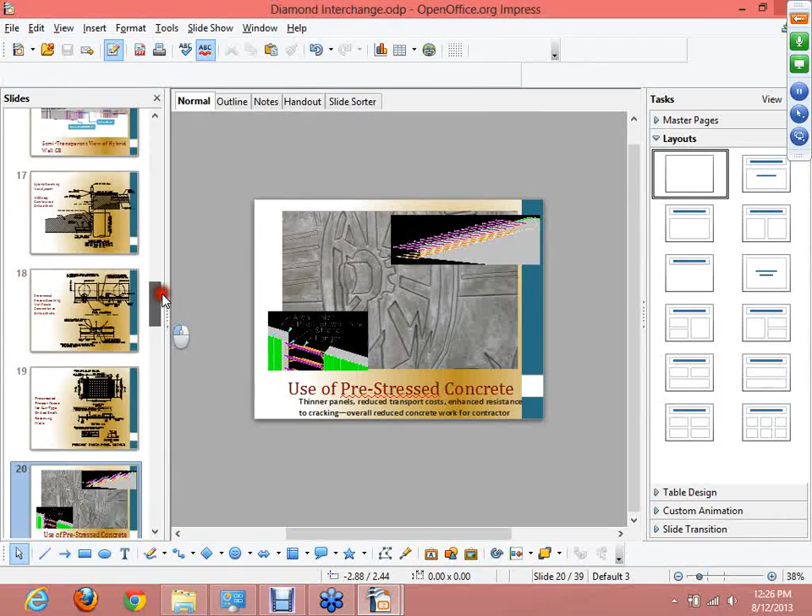A master's in management program with various schools, including Harvard Business School. During his early years, he designed highway and railroad bridges in Illinois, Michigan, Florida, and Washington, ultimately becoming registered as a civil engineer in 11 U.S. states. With over 27 years of award-winning structural design and construction experience in transportation, light and heavy rail, Mansoor has become a leading voice in the transportation industry for projects with alternate delivery.

His hands-on style and detail-oriented nature have produced several award-winning plans throughout the U.S. Recently, here in the DFW Metroplex, Mansoor has had the privilege of leading the Bridgefarmer engineers in the design of 4 monumental mega projects. These include the DART Orange Line extension from Bachman Station to DFW International Airport, the DFW connector areas 1 through 3, the LBJ managed lanes, and the Loop 12 114 Interchange, which we will be hearing about today. Please help me welcome Mansoor Ashan.

Thank you, Leslie. Thank you all for coming. It's truly an honor to be here presenting this very, very challenging and interesting project. It was a collective effort of a lot of people.

Can you all hear us? Nope. Can you lean in a little more? Was the microphone turned up? I think you just, if you can. Is it better? Nope.

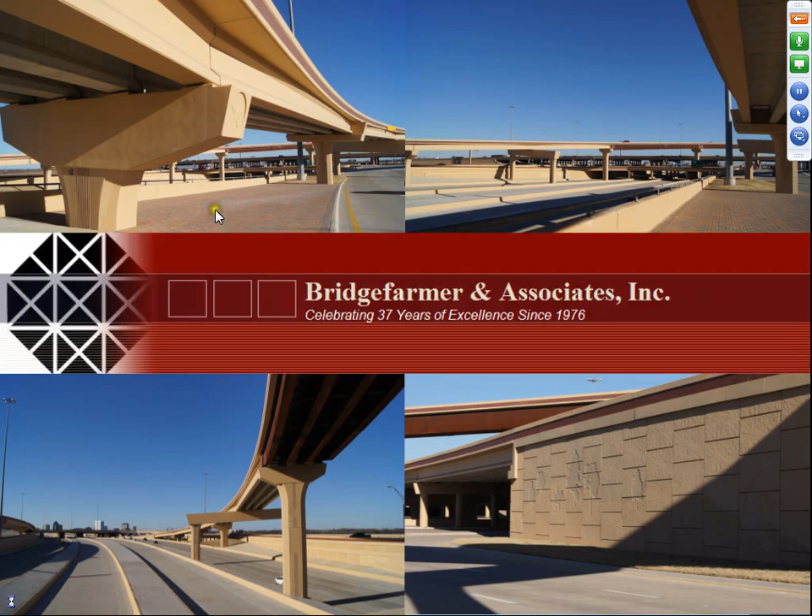My firm, Bridgefarmer, was the lead engineer on this project, and we were able to work with several agencies and several of the companies who were involved in production of these set of plans. I certainly want to acknowledge them and thank them for their hard work, for their help, and also for making Dallas a truly multimodal city now.

The reason this project is so dear to me and to so many other people is because this project has put us, Dallas Metroplex, as one of the leading cities in southern United States, where you can now have a choice whether you come from downtown Dallas going to the airport at DFW, or you are going to attend a convention at the city of Irving. You can use the train, you can always use the car.

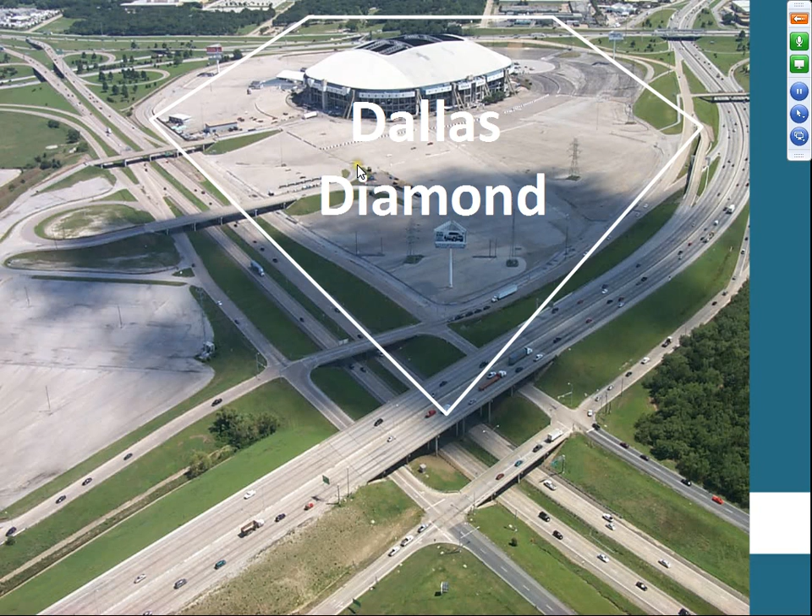But all kidding aside, this project is called Dallas Diamond because of the hard effort of several agencies who came together to put this extremely complex puzzle together.

Whether it's TxDOT, whether it's DART, whether it's City of Irving, whether it's the Irving Flood Control District, or the NCTCOG, they all worked hand in hand, and Bridgefarmer is fortunate, and my firm is fortunate in that regard, to have an opportunity to work with all of them such that we can build this extremely complex corridor where you have to deal with multiple agencies, you have to deal with multiple people who can come together.

I'm glad to tell you this, that projects like this don't happen when agencies are not cooperating with one another. We have seen that across the nation in many locations where cities, counties, and alike, they don't come together for the common good of the project.

What made this project so special is that all of us had one single plan, and that was to build this corridor, build the light rail, build what's needed for the city of Irving, what is needed for the city of Dallas, and what's important to DART, and at the end of the day, keep TxDOT's mobility menu in mind and make sure that that works.

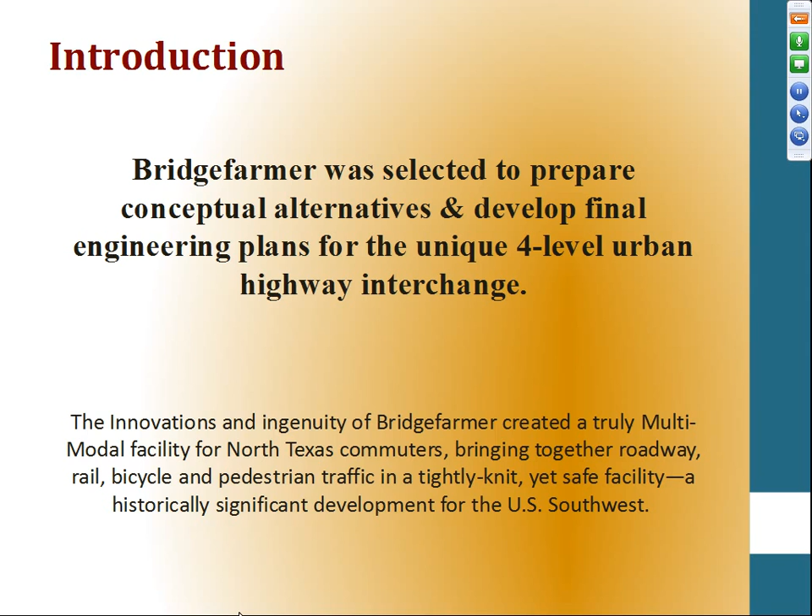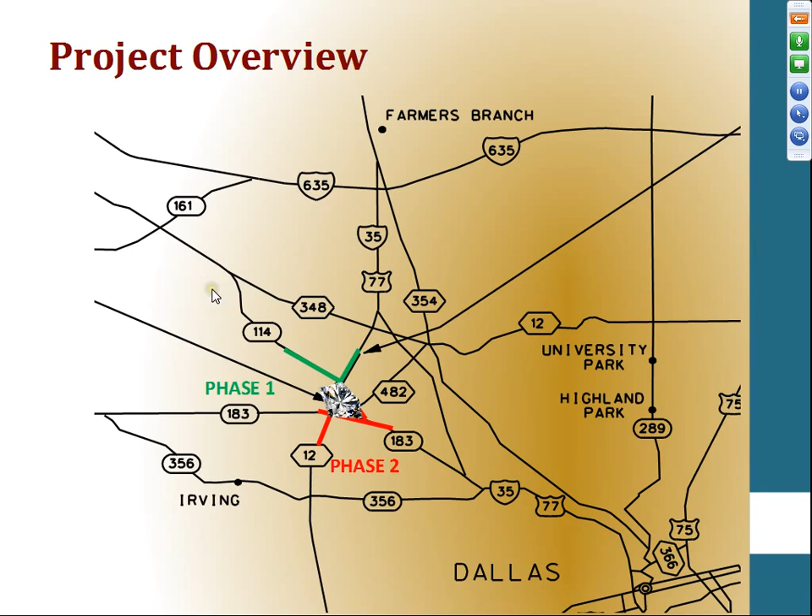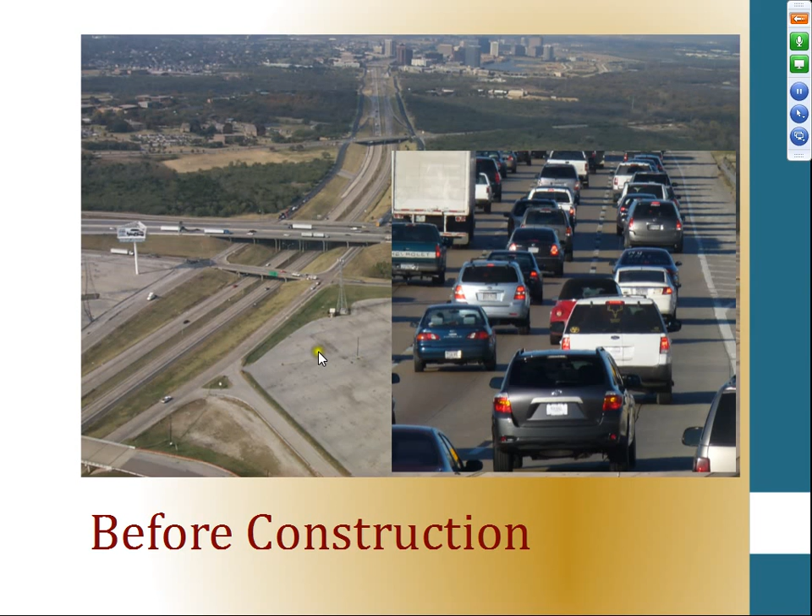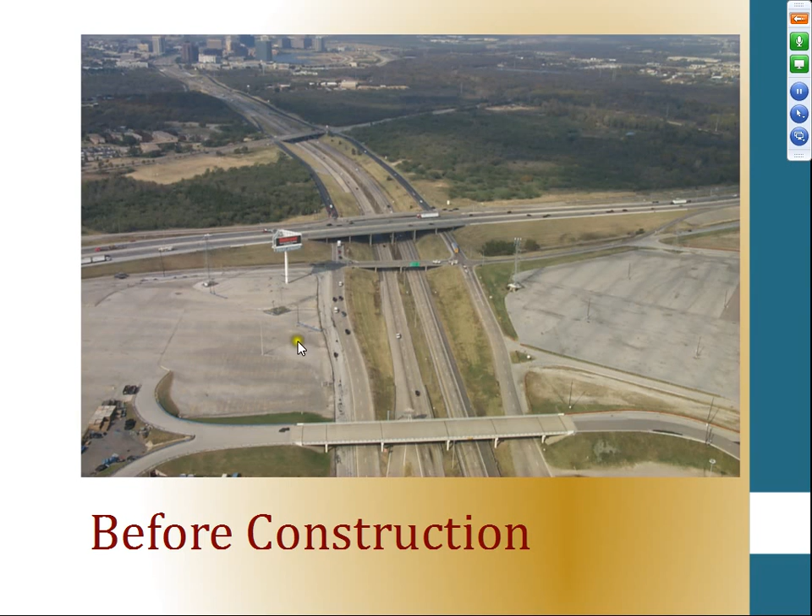These are some of the pictures of before this corridor started to get this facelift. Most of the structures were built in the 60s and 70s, and they were dated. The lane widths were not sufficient, the capacity was not enough, and the structures were not adequate, neither structurally nor capacity-wise.

So when we got involved with the project, we saw a few challenges which were truly unique to engineering. First and foremost was the coordination amongst the agencies, a traffic volume of about 200,000 cars, and a shared right-of-way between TxDOT and DART.

Poor soil, and the soil conditions over there are extremely changing and diverse. Our geotech partners at that time helped us quite a bit to come up with unique ideas on how we were able to build this corridor.

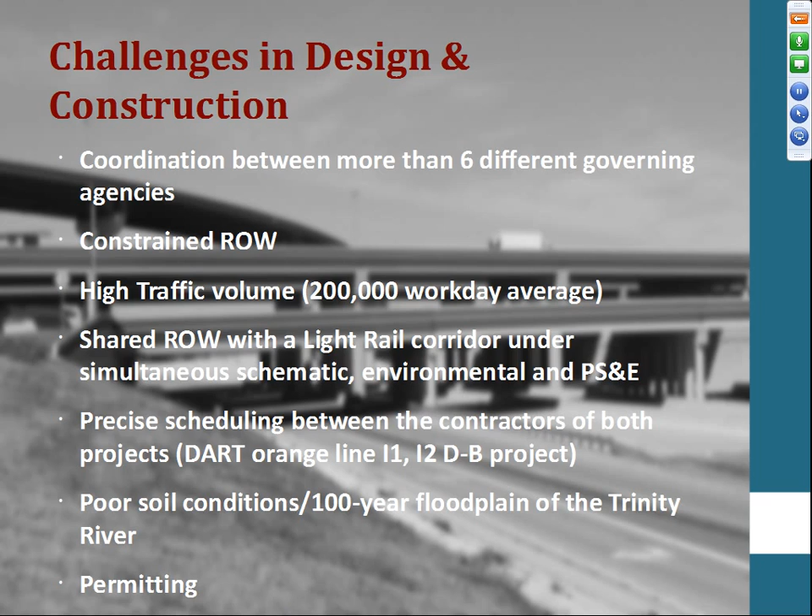And then, as all of us know, whenever you are working in the floodplain, you have issues to deal with the permits, whether it's 408, 404, or alike. I certainly am not a permits guy, but they are never easy to get approved or get the coordinations done.

This project had 19 different types of bridges, about 600,000 square feet of deck area, and 33 varying different types of walls, some MSE walls, some hybrid walls, and some conventional cast-in-place walls.

Then the construction of light rail, construction of the freight rail, a rail crossing over a rail, vertical clearances, catenary poles, and then to top it all, the accelerated schedule of the project. Our client, which was TxDOT, asked us to complete the job, and we could not delay the schedule and had to get all the players on board day one.

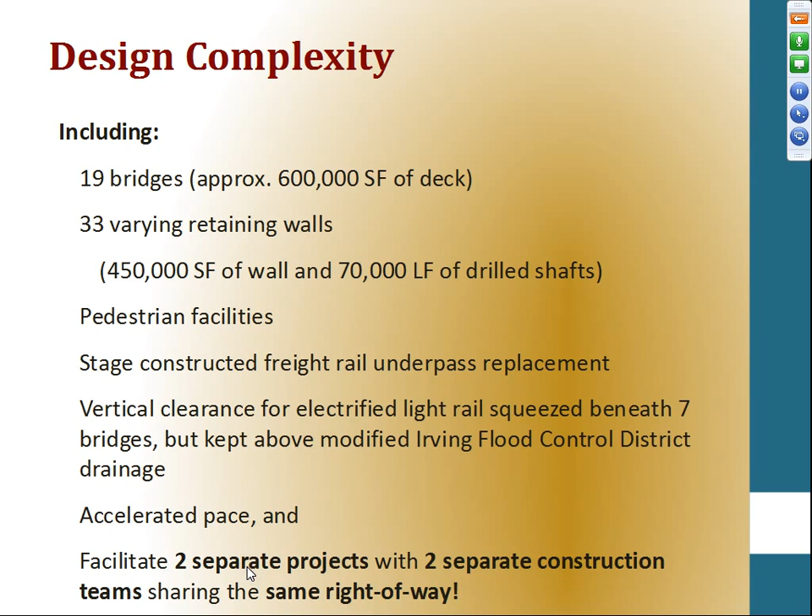For the purpose of civil engineering, as an engineer, I would like to draw your attention to these four major items, which were extremely challenging for an engineering project.

This project was first of its kind to use pre-stressed, precast concrete retaining walls. At that time, it was also first of its kind to use hybrid walls, and also first of its type to use 3D modeling, as we use now quite often on all the design-build projects Bridgefarmer is involved with. We certainly do 3D modeling for our contractors, whether we use a Terra model or whatever software contractors like to use. They ask for a 3D model, and we always provide them.

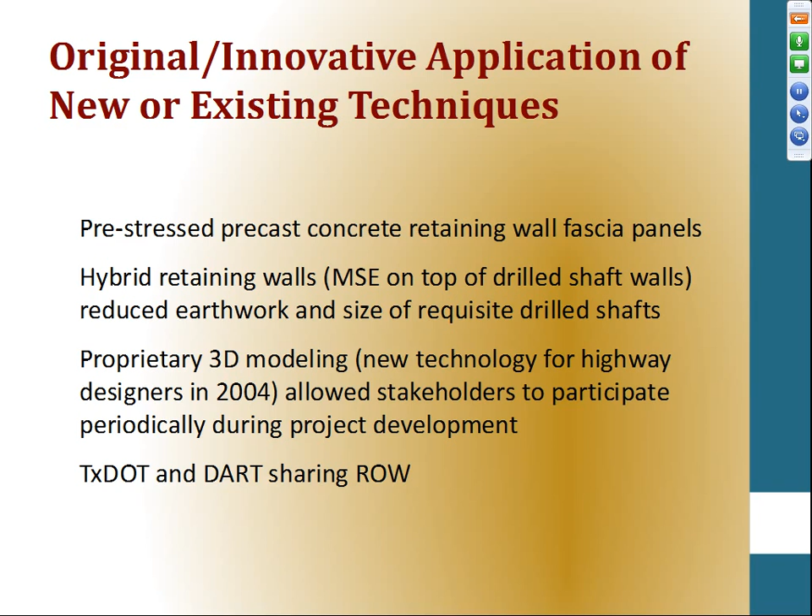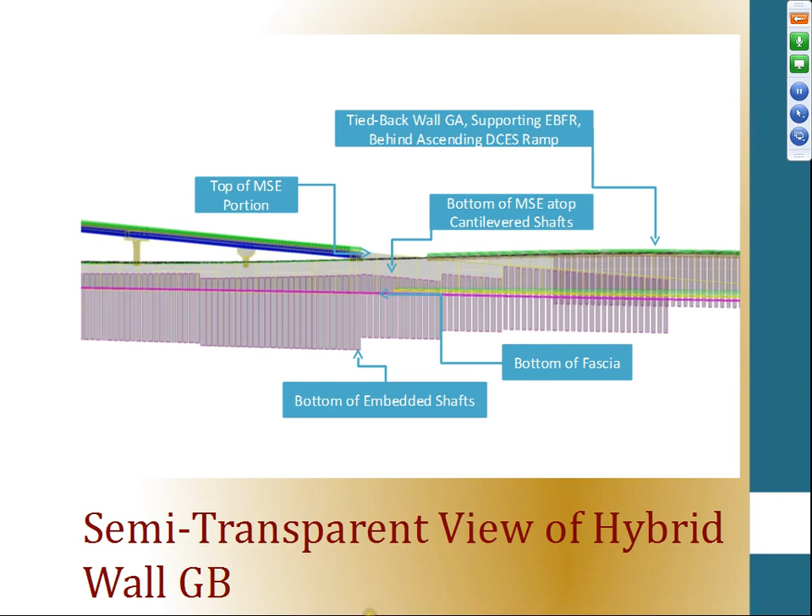And then sharing the right-of-way between TxDOT and DART. This is a picture of how the wall system was put together and how these walls came together for this corridor.

This is pretty interesting for all of us. As you can see, the cut section has precast, pre-stressed panels which are between the drill shafts, and the drill shafts are about 8 to 10 feet in spacing. Our team came up with this idea that if we use pre-stressed panels, we can certainly increase the spacing between the drill shafts. It helped the constructability and it also helped the contractor build the job faster.

But as you notice on top of these drill shafts, there is an MSE wall, and that's in the fill section. This is a typical section happening at one location and several times. So on top, you notice there's an MSE wall which is holding back the fill, and then this MSE wall is sitting on top of the drill shaft.

Without a leveling pad, without any kind of other system, our structural engineers have to work very closely with our geotechnical engineers to come up with a system such that the overall stiffnesses of these members work together. The assumptions of the soil properties are registered in our programs, which were our internal software used for this project, so they can be closely approximated to the situation in the field. And then, as you notice, to prevent the sliding, we have a lip on top of the drill shaft such that it could act as a shear key and engage itself when it's trying to slide out.

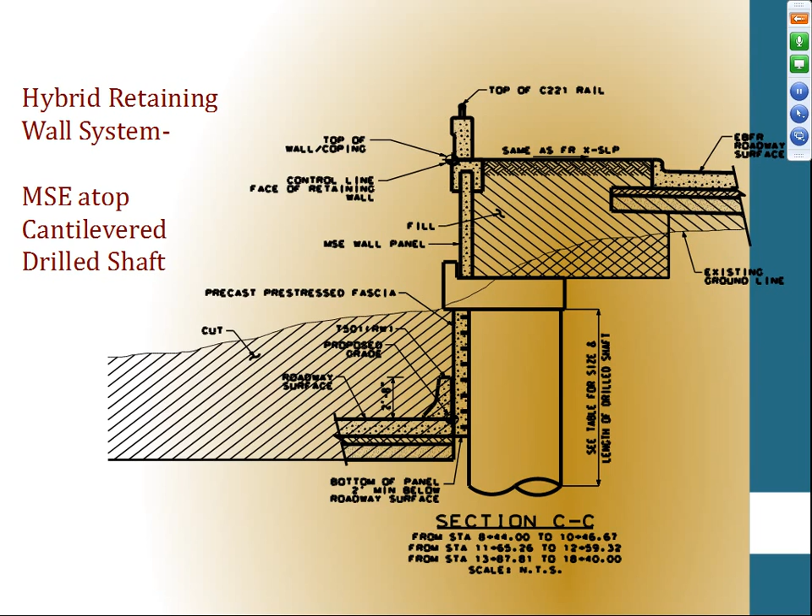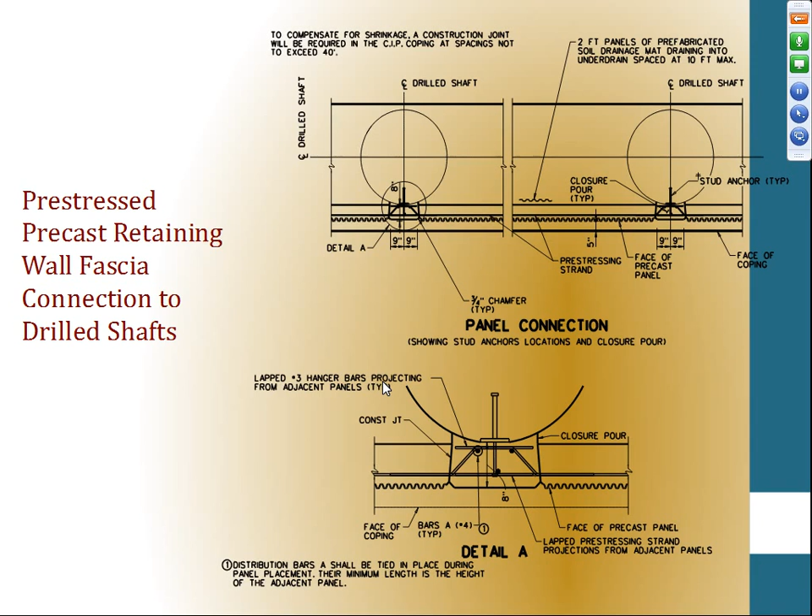Ordinarily, an MSE wall is an 8 inch thick panel or such, but we used about 4 to 6 inch thick panels because we were able to pre-stress them. To me, as a bridge engineer, it's no different than using PCP panels on decks. The pre-stressed concrete panels in the horizontal plane are applied here in the vertical direction, holding back the soil and taking the load. I think it's a pretty clever application for situations like this. I encourage you all to look into this for your projects, because this could save several drill shafts, and we were able to save about 30% of the drill shafts on the entire corridor.

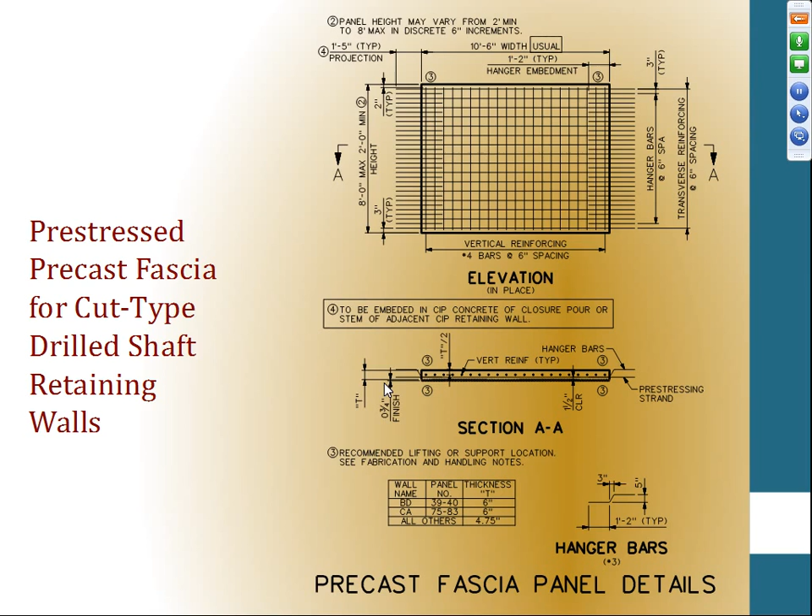This is a detail of the pre-stressed panels when they come together. You can see the strands protruding out, and on the bottom side you can see that they are being lapped together.

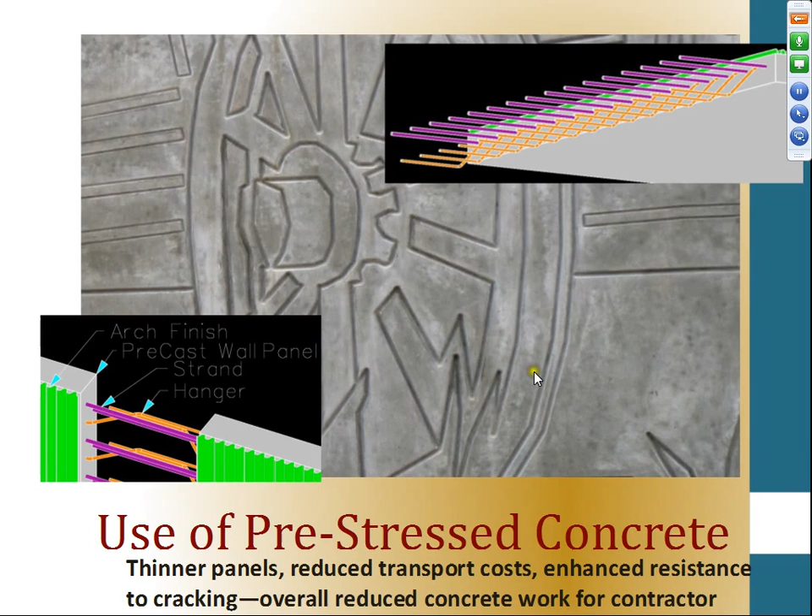This is the completed work, or the work in progress. As you can see on the top picture, the top portion of the wall is on the fill section, and the bottom portion of the wall is on the cut section. Providing this kind of detail certainly helped the contractor keep up with the schedule. Despite all kinds of issues at that time, it was very helpful to have a hybrid wall, a combination of drill shafts and MSE walls, transferring loads from the MSE walls back to the drill shafts, which were actually taking the loads in this application.

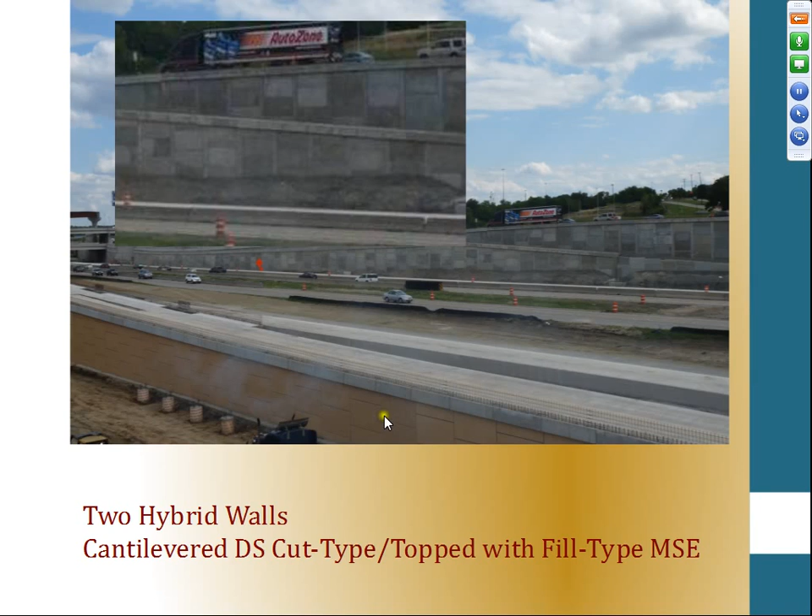I believe nowadays no job is complete without a 3D model. 3D modeling has truly changed engineering nowadays. It helps design-build projects go faster, it helps bid-build jobs go faster, and from a consultant standpoint it keeps the owners, whether it's TxDOT, DART, or cities, very much engaged. Things important to them get involved, they are part of the discussion, and they give direction on how and where to direct the project manager or project team, especially on things important to them.

Imagine if you have 6 different agencies with 6 different interests, you have to have something which matters to them, and a lot of times something important to TxDOT may or may not be important to DART. We believe this tool was very helpful. We believe it helped get meaningful conversation, and it was very engaging in terms of getting all agencies' buy-in on the progress of the project.

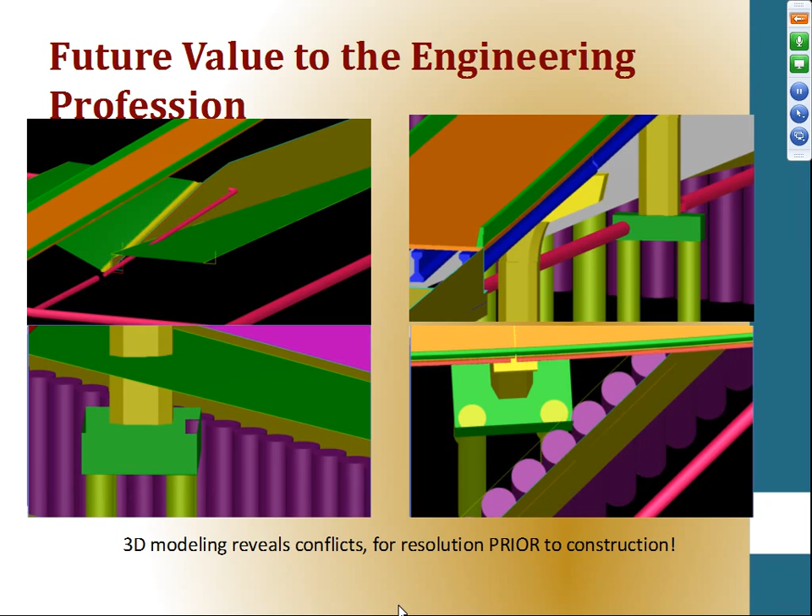As you can see, these pictures show that if you have a drill shaft conflicting with a footing, a utility conflicting with a footing, or utilities messing with your walls, you can quickly see that. The way we did this project was we developed this at every step. We had a weekly progress meeting and every week we would invite our partners, and they would see the development of the project in 3D to see whether or not things important to them were truly taken care of. So these meetings, when we invited utility folks, or DART, or TxDOT, were very helpful for them to see and address the issues which were critical to them.

One of the other challenges on this project was that this corridor, the orange line I-1, I-2, and eventually I-3 connecting to the DFW airport, had to go through the same corridor. That challenge was truly monumental because DART, rightfully so, wanted a quicker, faster delivery of the project, hence it was a design-build project, and TxDOT had selected a contractor with a low bid to build this corridor.

From the design standpoint, we were dealing with poor soil, we were dealing with over 200 various types of utilities in setting up a different kind of utility corridor. And then, to make things interesting, when we go over Loop 12, we had only 2 choices. We said, well, how do we accommodate the needs for DART, whether we go over the top of Loop 12 or whether we go under Loop 12?

As you know, tunnels aren't popular in Dallas. If it was popular, we'd be building a tunnel today on LBJ, but you know it's going to be an open cut, so we knew that part wasn't going to work. At the same time, when we looked at going over Loop 12 with the DART light rail, it caused an extremely long structure with long straddle bents. The bridges got very long, and the cost of the project went much higher than the original budget.

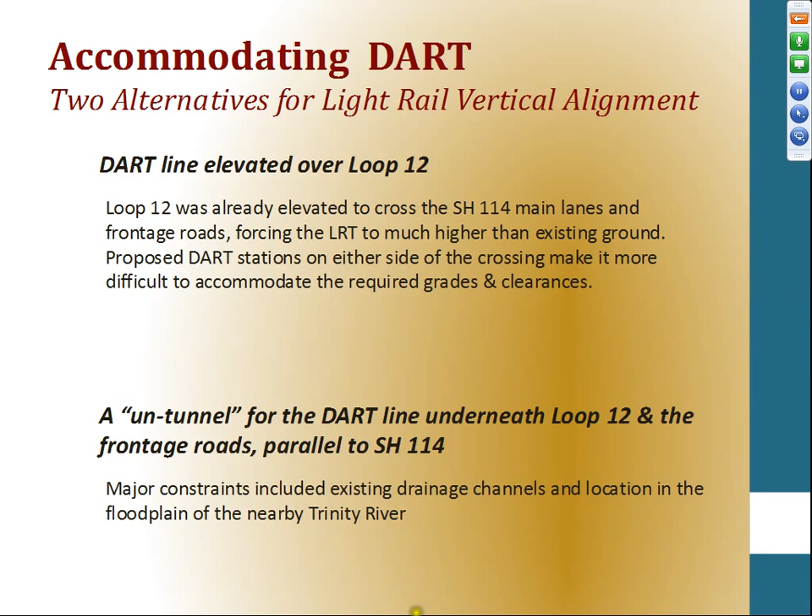So we came up with the idea of doing a tunnel, but we called it an untunnel, because a tunnel over 300 feet long requires ventilation, life and safety provisions, and all the requirements of a tunnel. Our designers and team came up with the idea of an untunnel so we could provide ventilation in that area. Here's a good example where we were able to keep one side open, and by doing so, we avoided the ventilation requirement.

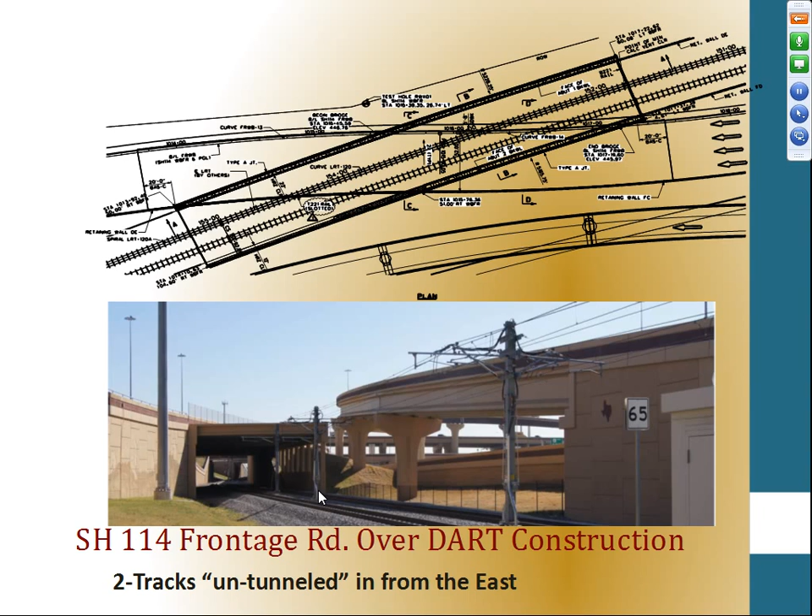This is the light rail going under State Highway 114. You can see catenary poles on both sides. We weren't able to go over the bridge because of vertical clearance requirements, and we weren't able to raise the profile.

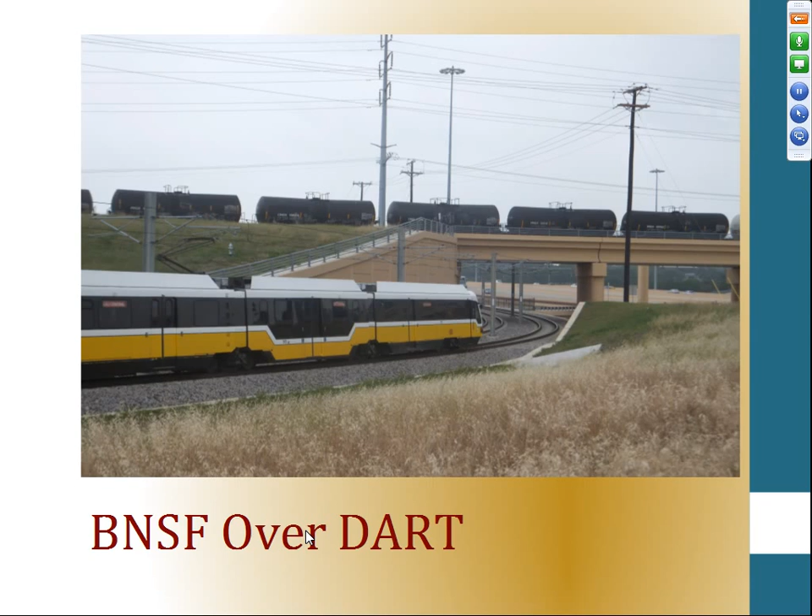How many times do we see this, where a rail is crossing a rail? You have a BNSF line on top of a DART light rail, and BNSF has 33 trains running on this very active, very busy track. We were able to put an agreement in place between DART, TxDOT, and BNSF so that we could get the project done on time.

The constricted and restricted right-of-way was a challenge for both designers and for construction. Due to the restricted right-of-way, there was no launch area and no construction site available for the contractor.

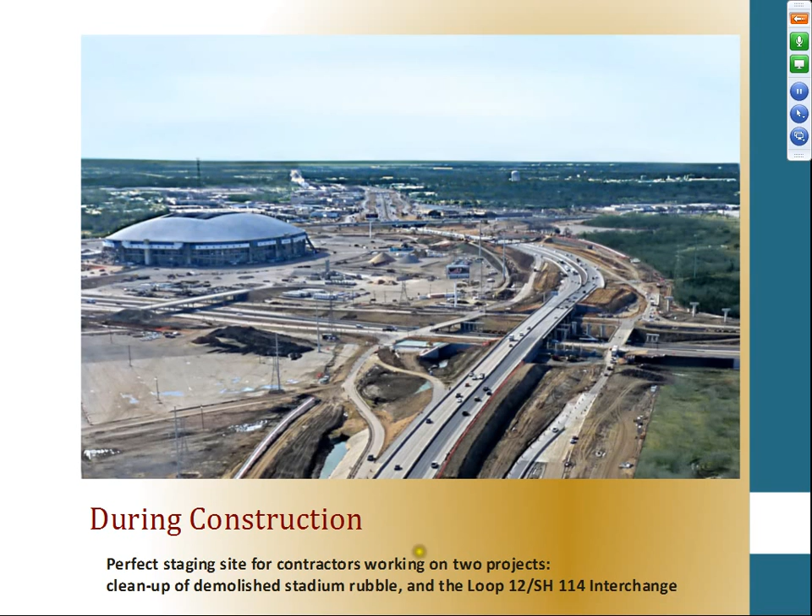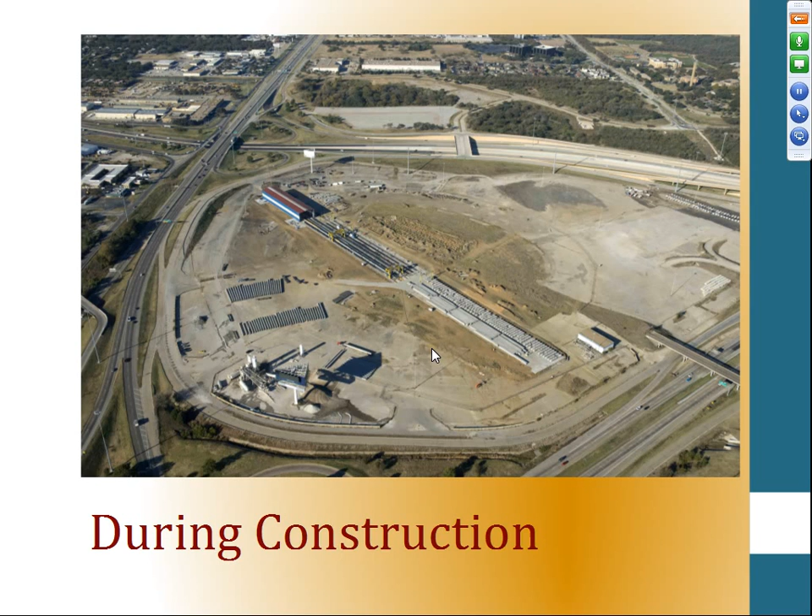So when the old Cowboy Stadium was imploded, this area opened up, and now it's being used for the construction of beams. You might see driving by that there are a lot of beams being fabricated here, as this area has become available as a launching pad.

This project is also one of the first ones with barrier-separated concurrent managed lanes, and you can see that being constructed here.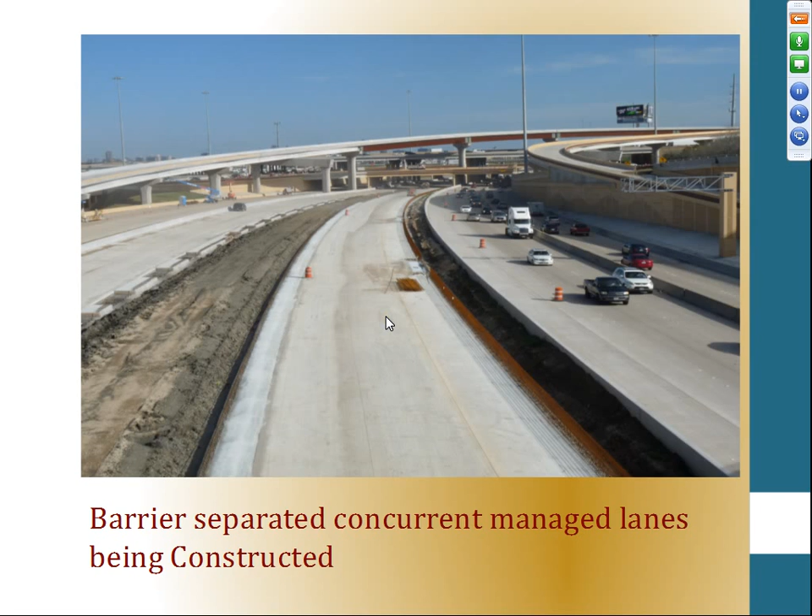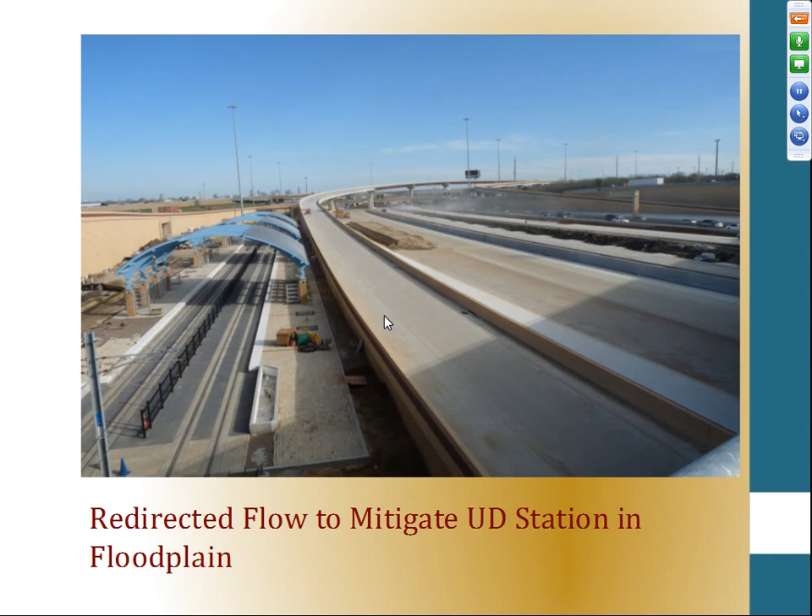The current station, the University of Dallas station, is in the floodplain, and we were able to redirect the flow to mitigate impacts to it. It was a challenge for the entire team and the City of Irving Flood Control, who worked very hard to come up with a solution so we could provide a station where DART desired, allowing students to easily get back to campus. This is perhaps a good shot of the completed University of Dallas Station.

Once the project is completed, look at the length of the drill shafts and straddle bents, which are over 100 feet at some locations. This particular picture is very interesting from a bridge structures and structural engineer's standpoint. You can see a straddle bent, and the beams resting right in the center of it. Usually straddle bents carry load at one location or the other, so this was the worst possible place for the load to come in.

On the far side, if you're driving by, as all of us civil engineers, myself included, are nerds by nature, I look at the walls and say, okay, there's an MSE wall, there's a cast-in-place wall, I can see a drill shaft wall, and I can see something else going on. And that's exactly what this job is, there's something else going on, so it has all kinds of challenges. Once you drive by, you can see different kinds of walls each doing the purpose for which they were designed.

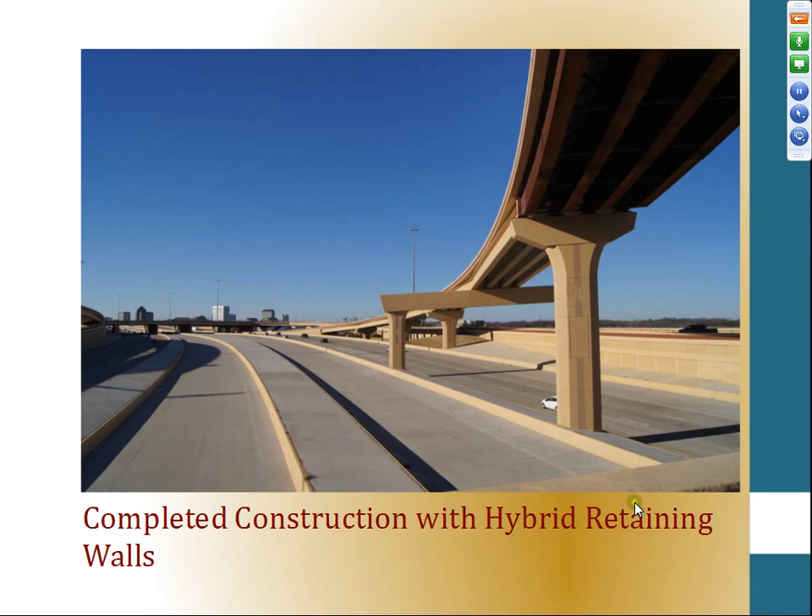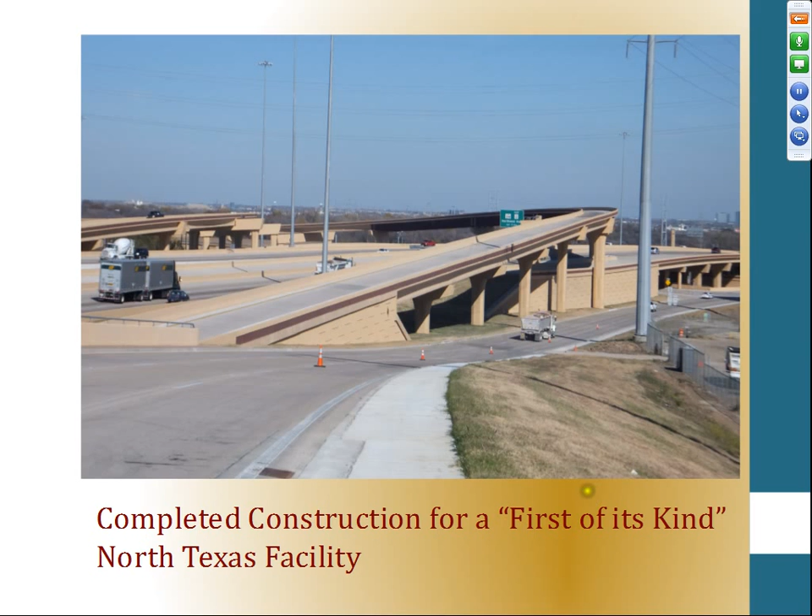Once this job and this project is completed, it has put us, Dallas Metroplex, as the poster for the southern United States to build the very first multimodal corridor where you can fly into DFW Airport and have a choice of renting a car or taking a train. You can take a train and attend a conference in the City of Irving, go downtown Dallas, and take the train back and fly out. It's no different than what you'd do in Chicago, Boston, or any other modern city. We are glad Bridgefarmer was part of it.

This is a completed picture of the project.

This project has also improved student ridership. It has increased the number of students attending University of Dallas and given people the choice to take the train to campus, increasing enrollment in colleges.

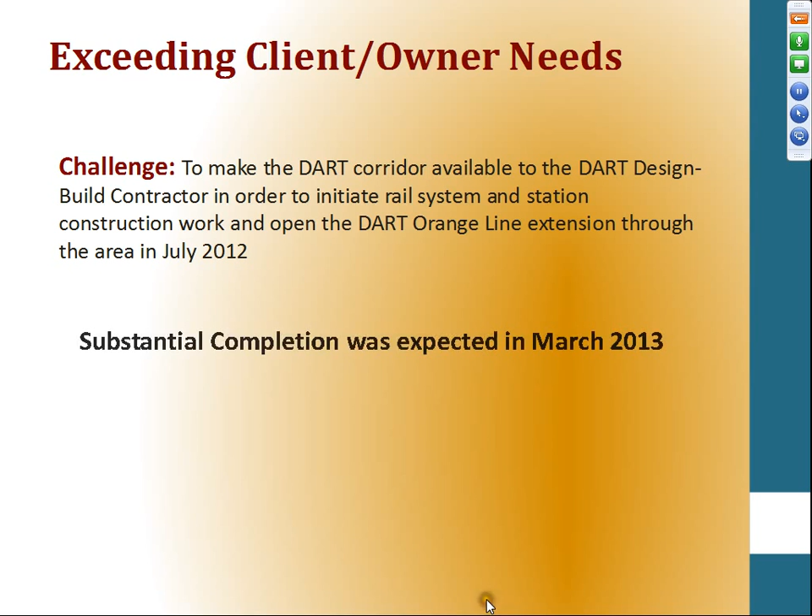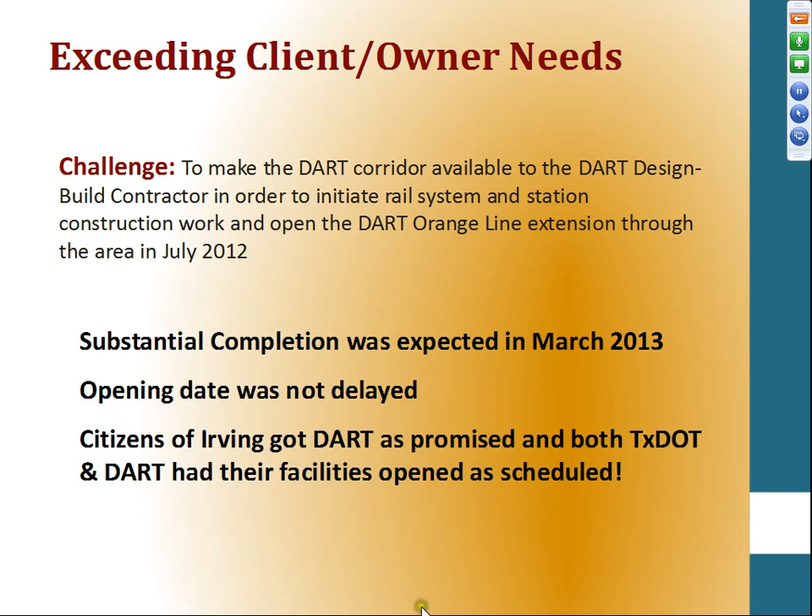The project was completed in March of 2013. Citizens of Dallas and citizens of Irving were promised this corridor, and the project met the schedule. Because of its uniqueness, the engineering challenges, its coordination, its construction, and the farsightedness of all the leadership in this area, it truly got this project recognized nationwide.

It was awarded the National Gold Award and the Local Gold Award because of the engineering challenges we all deal with as engineers day in, day out at our jobs. But thinking not just from an engineering standpoint, but how to solve a problem of mobility, how to connect the cities, connect the modes of transportation, and make life easy for all of us—that's what this project did.

Once the second phase of this project is completed, this multimodal corridor will have several interchanges which will make our mobility much better, probably by the end of next year or so.

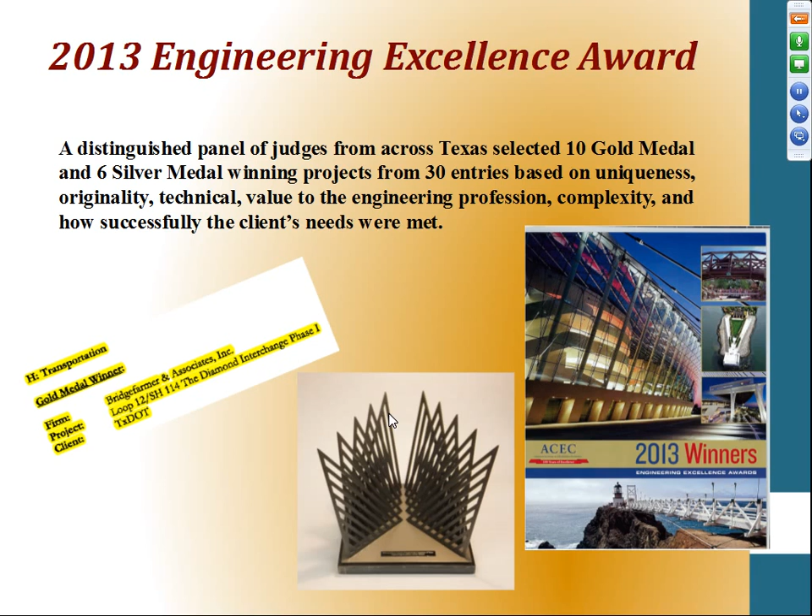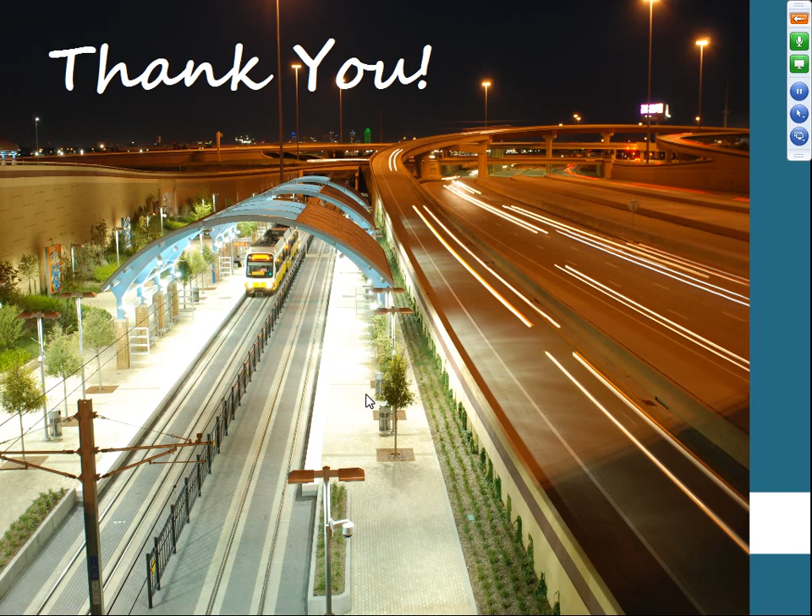With that, this was my last slide, and this is a good picture I want you all to see. At least I am, and the Bridgefarmer team is very proud that we were able to accomplish this and work with outstanding clients who gave us all the support throughout. Thank you so much, and I'm here to answer any questions.

We've got time for a couple of questions if we have any.

The project was $238 million from the TxDOT standpoint, and that was for the Loop 12-114 highway part. And I think from the DART design-build side—I don't know how that math worked out—that was about $400 or $450 million for the I-1, I-2 corridor.

We have our internal software, and we have a fairly rigorous R&D program internally at Bridgefarmer, and we use that software for most of our complicated projects. Commercial softwares, which you're all familiar with, like RISA or STAAD or any of the TxDOT publicly available softwares, we use those too. But for complicated projects, we use our internal software.